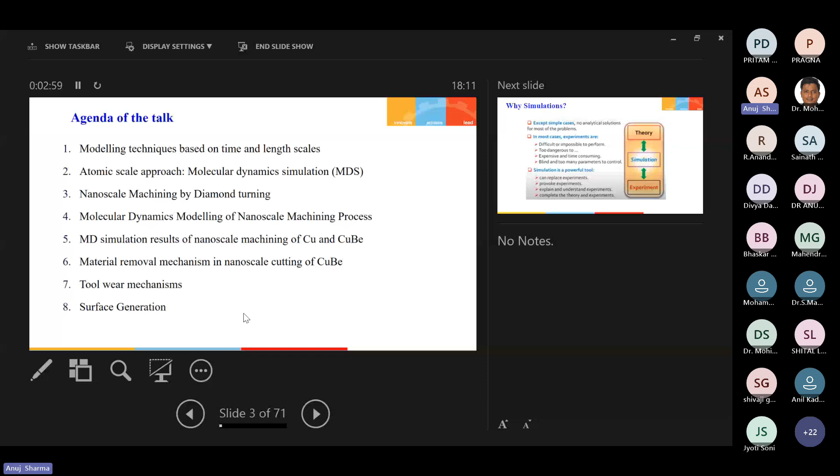So first question is why simulations? Simulations are important because except for simple cases, there are no analytical solutions available for most problems. So in those cases, either we can go for experiment or simulation.

But in some cases, experiments are also difficult to carry out, like the case of shock waves or blast experiments - these are very difficult to carry out. So there we need some kind of simulation where these experiments are either very expensive or dangerous to carry out.

So simulations help in these scenarios to understand the phenomena. Also sometimes experiments are expensive and time consuming as well, so simulations are very helpful there. And sometimes there are too many parameters to control, which also makes the studies difficult.

So simulation helps in saving the time, money, and also the safety - as I said, in some experiments the safety concerns are there. So these concerns are eliminated in the simulations.

Simulations are also very powerful tools where they can replace experiments, if any finding is there. So they also tend to provoke the experiments, motivating us to carry out some experiments.

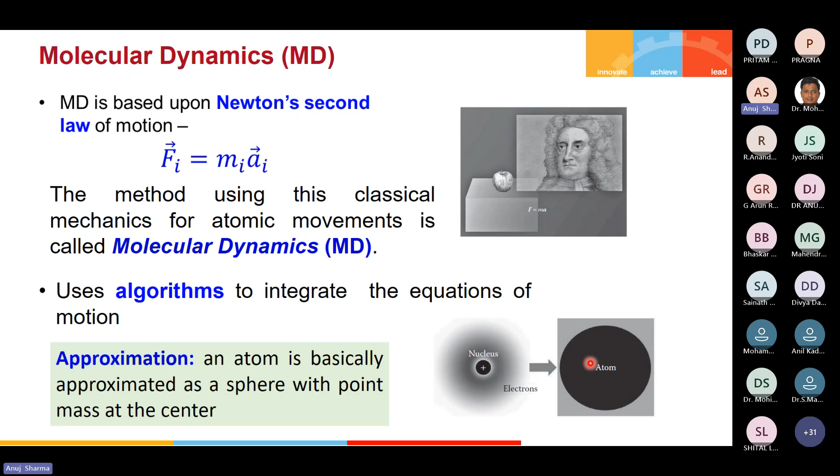Now, as I said, we have to use an interatomic potential function. For example, when atoms come close, they feel attraction first, and then repulsion. So up to a certain distance they feel attraction, and after that, if they come closer, due to electronic repulsion they will have some repulsion. These phenomena are put into an interatomic potential energy function, provided between the two atoms, catering for the repulsion and attraction that usually happen due to the electron and nucleus. Basically, we are not considering the electron and nucleus there, just these energies are considered by this function.

As I said, under the influence of force, this atom will gain acceleration, which is nothing but the derivative of velocity, and the double derivative of position. So if I integrate it two times, we get the position, and if we integrate it a single time, we get the velocity. But we should have another expression for the force, so that we can equate it to this equation. There is another equation for the force: if we take the negative gradient of the potential energy, then we get the force. So basically, one is the force between atoms, which is defined by this interatomic potential energy function.

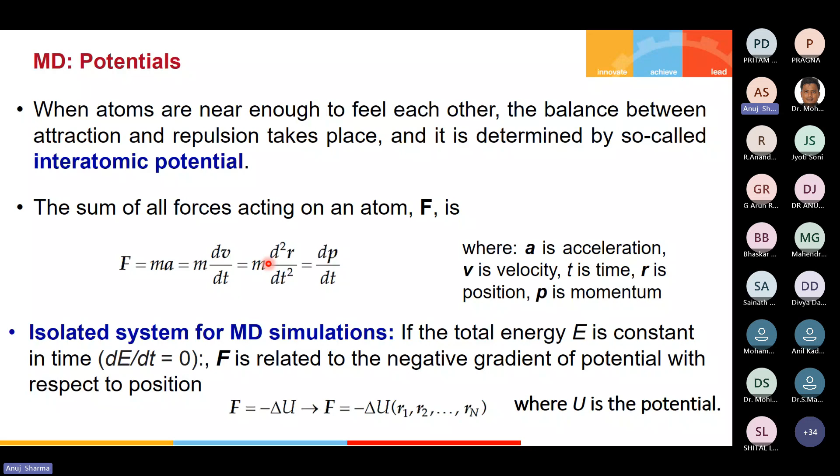This U is a function of the position of the atoms. One atom will be surrounded by different atoms, so that energy is stored in this U. If we take the single derivative with respect to R, the position, we get F, which can be equated to mass into acceleration. If we double integrate this expression, we get the position, and with single integration we get the velocity. In that way, we get the position and velocities of the atom, and at every time step we update those positions, velocities, and acceleration. So in that way, the time evolution of atoms happens in the simulation.

Now comes the thing of how we relate macro scale properties with micro scale behavior. In macro scale variables, we get things like volume, if we consider the gas, then volume of the gas, pressure in the gas, or temperature of the gas. But in the microscopic approach, we only know the velocities and the positions of the atoms inside that gas.

We have to relate these microscopic parameters with the macroscopic variables. This is the requirement. Then only we can analyze the macro scale processes with the help of the microscopic approach. This requires our statistical mechanical approach, which links the position and velocities of the atoms with the macro scale properties like volume, pressure, or temperature.

So there comes the famous ergodic hypothesis, which states that the ensemble average or sample average can be used to compute the average values, which can be replaced by the time average over the simulation. Basically, every macro state has different microstates. These microstates are sampled by molecular dynamics simulation using a small subset, known as the thermodynamic ensemble.

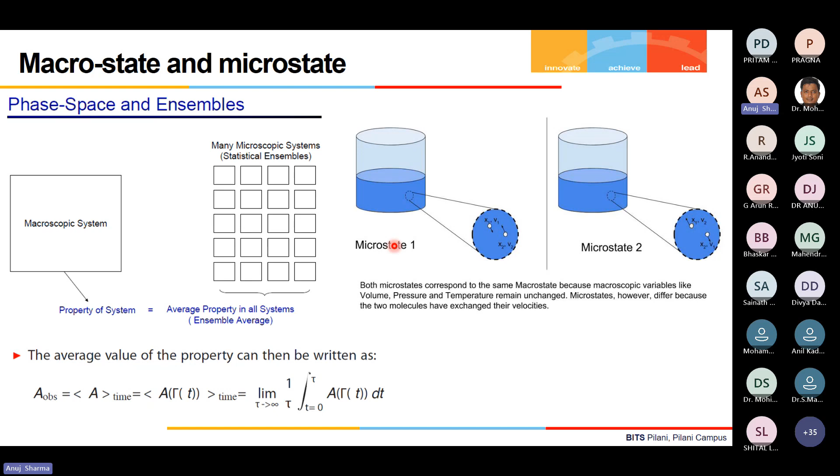So this phenomena is used in molecular dynamics simulation, that over time, if we integrate the properties, that will be equal to this average, which is the subdivision of this macroscopic system. Basically, the ergodic hypothesis states the long time average is equal to the ensemble average if we approach the time limit to infinite time. So for long time average, it will be equal. The ensemble average will be equal to your time average.

So there are various statistical ensemble systems which are used in molecular dynamics simulation, like the microcanonical, the canonical, and isothermal-isobaric system. Microcanonical is NVE - number of atoms, volume, and energy will remain constant throughout the simulation. Here your energy will be conserved, but temperature can vary, temperature or pressure can vary. In canonical ensemble, your number of atoms, volume, and temperature will remain constant.

These kinds of things are usually studied in endothermic or exothermic reactions. Temperature will remain constant, but energy can be exchanged between the system and surroundings, and also pressure may vary. In the third system, this is NPT, where the number of atoms in the system, the pressure and the temperature remain constant, and your volume may vary. This is close to our laboratory condition where ambient pressure and temperature are usually constant. So these three ensembles can be used for our molecular dynamics simulation.

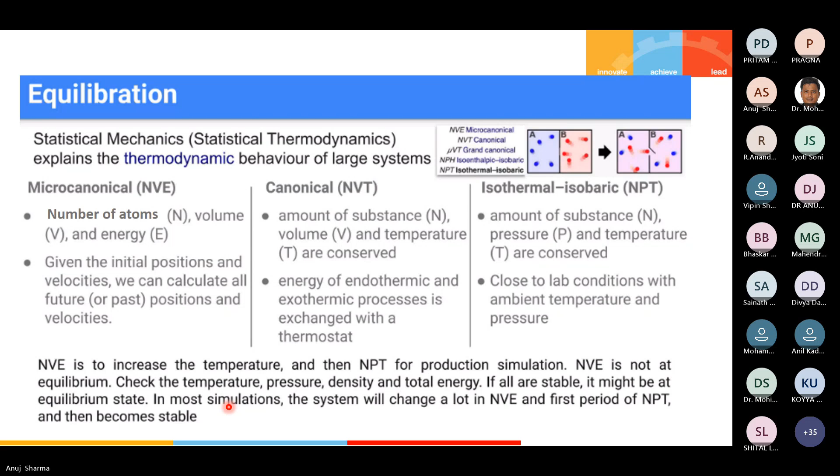So now the question that comes is what can be done with molecular dynamics simulation. Our MD can be applied to systems containing metallic systems, non-metallic systems, polymers, biomolecules, any chemical system - any chemistry we can study with this. But the limitation is that we have the length scale of nanometers and time scale varies from nanoseconds to microseconds. And atoms we can go for few hundreds to few million, but not very large systems can be studied.

And the phenomena we can study - chemical, mechanical, or physical phenomena - over these length scales and time scales. MD is suitable where experiments are not feasible, like if we have to microscopically analyze any system, cutting system, or any mechanical system, then we have to go for molecular dynamics study. And where the discrete effects are dominant, meaning your continuum approach is not valid, where the material has many impurities or heterogeneities - in that case, we cannot consider the material as homogeneous in nature, so we have to apply the molecular dynamics simulation approach.

And as I said, it is applicable for nanometric length scales, so we cannot apply this approach for very large systems like continuum scale problems.

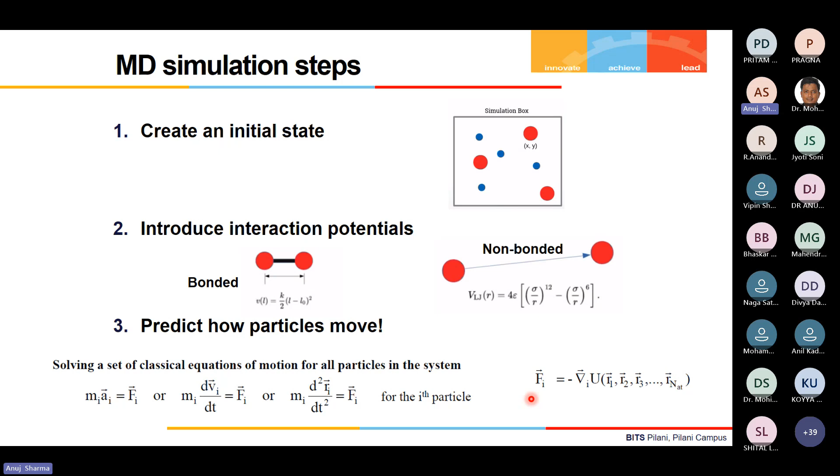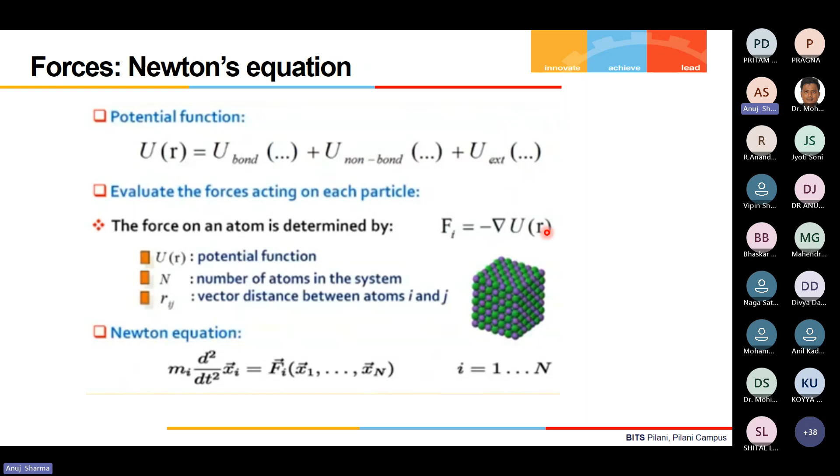What are the potential functions? As I said, they can be bonded, non-bonded, or external functions. Then we have to extract the forces between the atoms by taking the derivative of this potential energy, and the other equation is the force equation. So these have to be equated.

This potential energy can have different interactions, like attraction and repulsion. For example, when atoms come closer, first there will be attraction, and then there will be repulsion, so the energy becomes very high if two atoms come very close.

Similarly, there can be bonded attraction or charge-based interaction. If there are charges on the atoms, you have to add that formulation in the potential energy function. Similarly, if there are bonds, different orientations, angles, or rotations, every energy function has to be taken into account in this U.

Then we have to take the derivative of this U to evaluate the forces on each atom, and update the position or velocity of the atom. Initially we have the initial position and velocity, so we have to update this over incremental time, for one time step, how much it will move with how much velocity.

This is done with the help of Taylor series expansion. For example, we have to identify what is the position at the next time step, which is expanded using the Taylor series. Similarly, we can use this expression for the previous time step, which gives another expression.

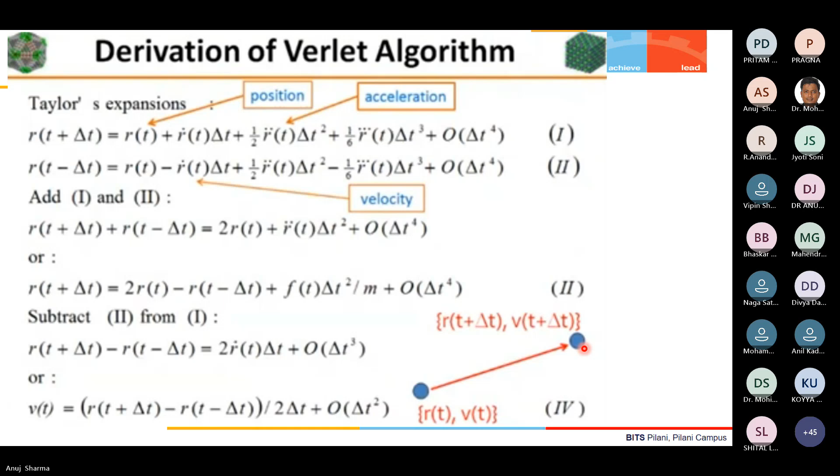Since these are MD simulation settings, we start with our atomic position, as I said, the initial position should be known. After that, we have to apply whatever material properties are there, like density, mass, charge, lattice constant. These kinds of things we have to mention in the code.

Then we have to supply this with initial velocity. Initial velocities basically depend on the temperature, based on the Boltzmann constant, or this equation, half mv squared equals 3/2 k into T.

So from the temperature, we can obtain the velocities. And then we have to apply the periodic boundary condition, because we have to simulate the bulk material properties. Usually we take it in nanometric scale, so to simulate the bulk material properties, we have to consider this periodic boundary condition. I will explain it later, but it's this PBC.

After we take the atom position and velocities into account, we have to set the interatomic potential energy function between them, because otherwise there will be no repulsion or attraction between those atoms. So we have to supply it with some potential energy function. There are different potential functions available in the literature.

After that, we have to select an appropriate time step, and it should usually be of the order of femtoseconds, because if it is larger, then we cannot understand the phenomenon happening at very lower time scale. So for understanding all the phenomena, we should select the least time step.

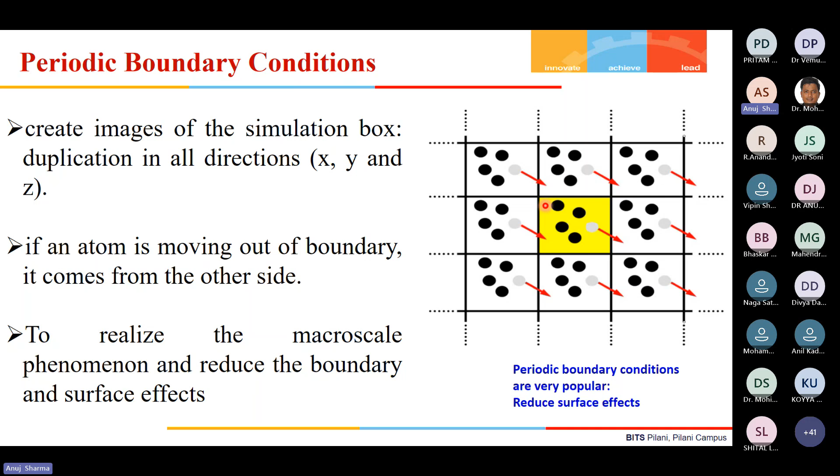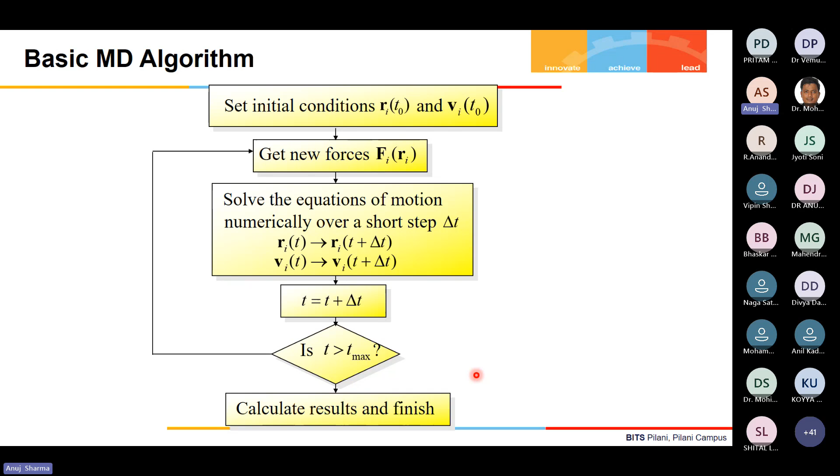Now I come to the nanoscale machining process, which is a single point diamond turning process that I have carried out during my PhD research work. It is basically an ultra precision machining process, a nano regime machining process in which the surface finish can be obtained within a few nanometers.

The shape accuracy can be achieved within tens of nanometers, and the size tolerances can be achieved in hundreds of nanometers. So everything is in nanometers. We cannot achieve these nanometer results if our cutting dimensions are of millimeter size. We have to use cutting dimensions in nanometer size, then only we can achieve surface finish in few nanometers.

So let's start with the significance of this ultra precision machining. In the year 1980, Taniguchi predicted for different machining processes how they will behave after 2000, like in 2020, what will be the nature of these processes. He found that the ultra precision machining process, which is single point diamond turning, will reach a machining accuracy of 0.01 micron, which is nothing but 10 nanometers.

This shows that the ultra precision machining process is able to produce better than 10 nanometer accuracy. And to get that nanometric level accuracy, the processing scale should be extremely small, then only we can achieve this nanometric accuracy. Single point diamond turning is the approach which can help in achieving this nanometric accuracy with very low cycle time.

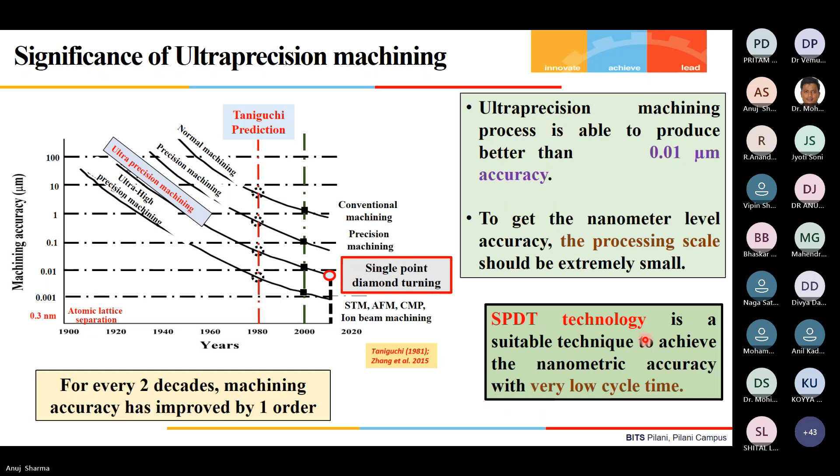So now I come to the diamond turn machining or single point diamond turning. It is basically a deterministic nano regime machining. Deterministic means tool path can be controlled. And as I said, the size tolerances, shape errors, and surface finish can be achieved within the order of nanometers. So basically, it is like a normal lathe machine, but this is supplied with very high-end technologies.

For the spindle, an air bearing spindle is used, and for the slides, hydrostatic slides are used. That can control the motion within the accuracy of nanometers, so only then we can achieve cutting dimensions in the order of nanometers. This spindle rotates the workpiece clockwise or anti-clockwise, and with the help of this relative movement between the tool and workpiece, we can achieve material removal.

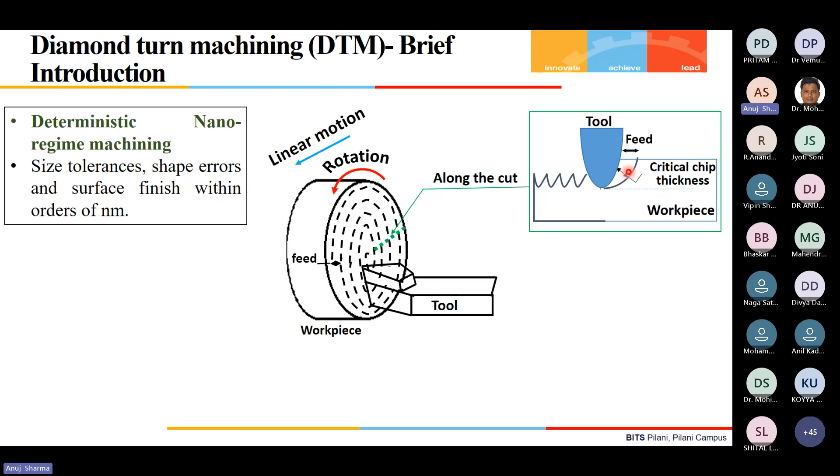Now, if we take this tool, we can see in cross section it makes feed marks on the workpiece, and this is known as the critical chip thickness. Below this chip thickness, no material removal will take place. So this is called the critical chip thickness. If it is more than the critical chip thickness, then only the material can be removed.

If we analyze closely this tool and workpiece interaction, we can see that the tool radius is in the order of nanometers, and the cutting depth is also of the order of nanometers. When these cutting dimensions, the radius and the uncut chip thickness, are in the order of nanometers, it means the atomic clusters of the tool and atomic clusters of the workpiece are interacting with each other, because there is a nanometric size of the tool, and the uncut chip thickness is also of the order of nanometers. That means they are interacting at nanoscale.

Coming to the diamond turn machine, it has evolved over the years. It started from 1960, where air bearing spindles were developed, and after that some feedback devices like optical encoders, which have accuracy better than 100 nanometers, were developed. After that, in the year 1979, the first diamond turning machine was developed, and regular developments took place. In the year 2010, this high-end machining, which has the capacity to generate free-form structures and micro features with size, shape, and surface finish of the order of nanometers, could be achieved. So it took a long journey and a long time to achieve these kinds of high-end surfaces by the diamond turning process.

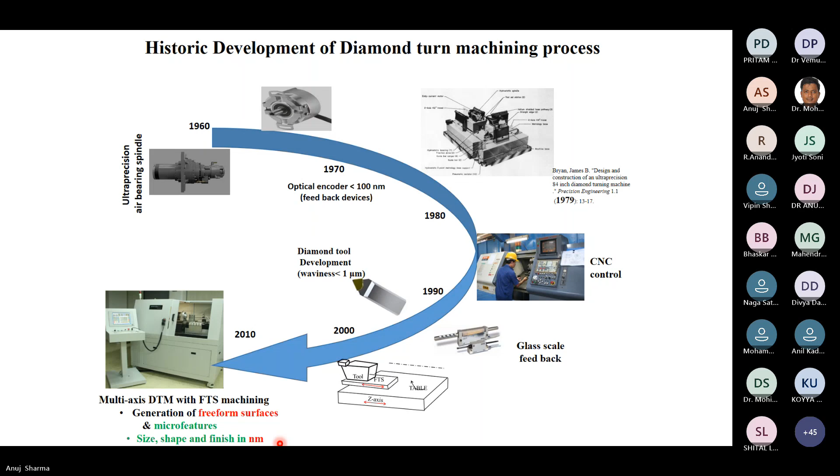If I differentiate between conventional cutting and nanoscale cutting: in macro scale cutting, usually your chip thickness is around hundreds of microns or sometimes in millimeters. In that case, the uncut chip thickness is very large compared to the tool edge. But in the case of nanometric cutting, it is less than 100 nanometers. There, your tool edge becomes dominant with respect to the uncut chip thickness. So in this case, the compressive forces or compressive stress is very high as compared to macro scale cutting.

This is the basic difference, and the mechanisms also get changed. Here you can see the shear plane cutting mechanism, where the chip comes over the rake face of the tool. But in nanoscale cutting, because there are compressive stresses, the material has an extrusion kind of mechanism. Extrusion means it can go to either side of the tool.

In terms of mechanics approach, because macro scale cutting is at a larger scale, we go for a continuum or homogeneous approach, considering the material as homogeneous in nature. Whereas in nanoscale cutting, since the nanometric size of the tool and nanometric uncut chip thickness are interacting with each other, we have to go for atomic scale simulation because it shows heterogeneity, where atoms or clusters of atoms in the tool and workpiece are interacting. So for the simulation method, we go for finite element method for macro scale cutting, but molecular dynamics simulation is adopted for nanoscale cutting.

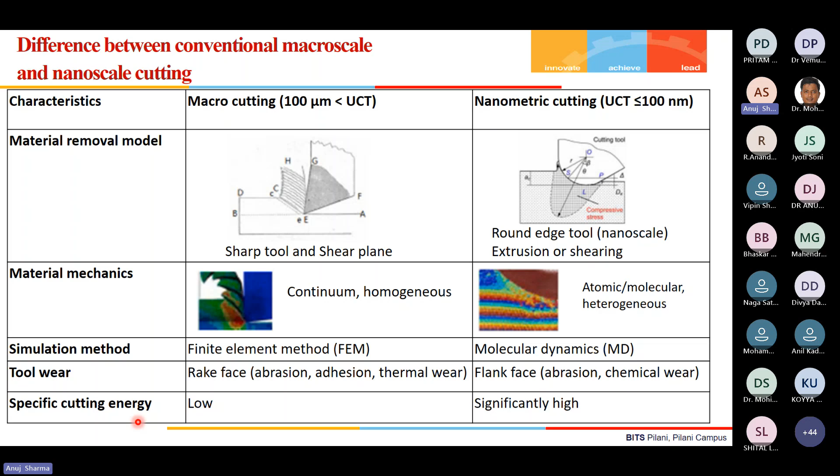And the specific cutting energy, which is the cutting energy required to remove a unit volume of material, is very low in the case of macro scale cutting - the energy requirements are very low, but it is significantly higher in the case of nanoscale cutting.

The motivation for this research comes from the fact that conventional machining has very high surface roughness on material surfaces, but with diamond turning you can achieve very low surface roughness, of nanometric level. In ductile machining, metals can be smoothly machined, but brittle materials result in fractured surfaces.

The motivation also comes from the fact that when we have a heterogeneous surface, like an alloyed surface with hard inclusions or particles, the mechanisms were not well understood. So in my PhD, I took that heterogeneous material to study with the help of molecular dynamic simulation, to see how it behaves during nanoscale machining.

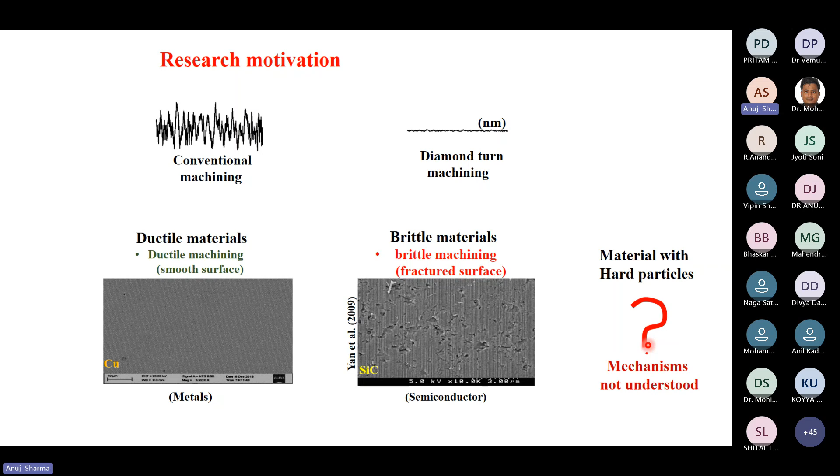For that, I carried out a decade-wise literature survey on the SPDT process, single point diamond turning. I found that this machining technology developed decade by decade. Initially, machine tool building took place in the first decade, and after that they slowly carried out machining and understood some process mechanics on soft materials, followed by understanding material removal mechanisms, surface quality, tool performance, and crystal orientation.

From 2005 to 2015, they tried to understand brittle materials machining and tool wear. Molecular dynamic simulation was also introduced in this decade. After that, they studied wear mechanisms as well as micro feature generation and freeform machining. In the current decade, there's a challenge to study difficult-to-cut materials, heterogeneous materials, or hybrid materials.

That's why I selected copper beryllium material to study, because it contains hard particles. It has a soft copper matrix with hard particles in between, making it difficult to machine. So I studied it with the help of molecular dynamic simulation.

As I said, there were research gaps, like hybrid material machining with diamond tools had received little attention. The effect of work material, mechanism of material removal, tool edge condition, and machine tool vibration on the diamond turned surface were not extensively studied.

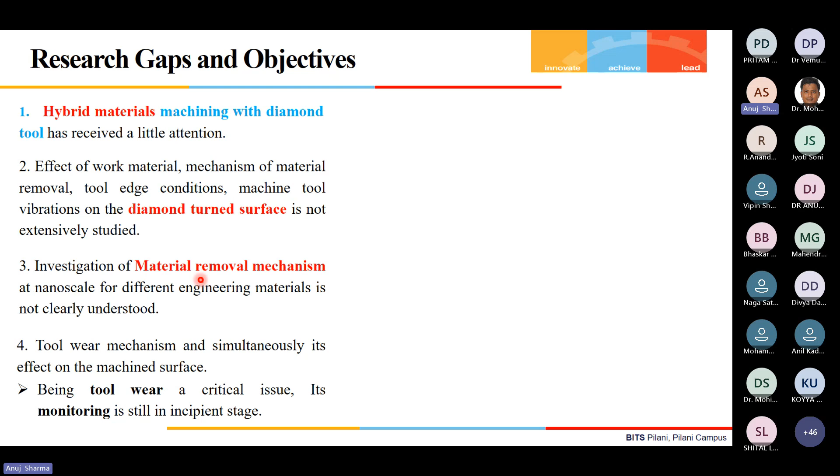Material removal mechanisms at the nanoscale are also not clearly understood for different materials. Tool wear is a critical issue because the diamond tool is very expensive, so tool wear needs to be understood for machining any material. Otherwise, if tool wear is high, it can lead to very large machining costs.

This led to some objectives, like studying tool and hard particle interaction during machining of hybrid materials. Another objective was applying molecular dynamic simulation to understand the material removal mechanism, tool wear mechanism, and the effect on the diamond-turned surface or subsurface damage, as well as developing a tool wear model based on the mechanism and tool condition monitoring.

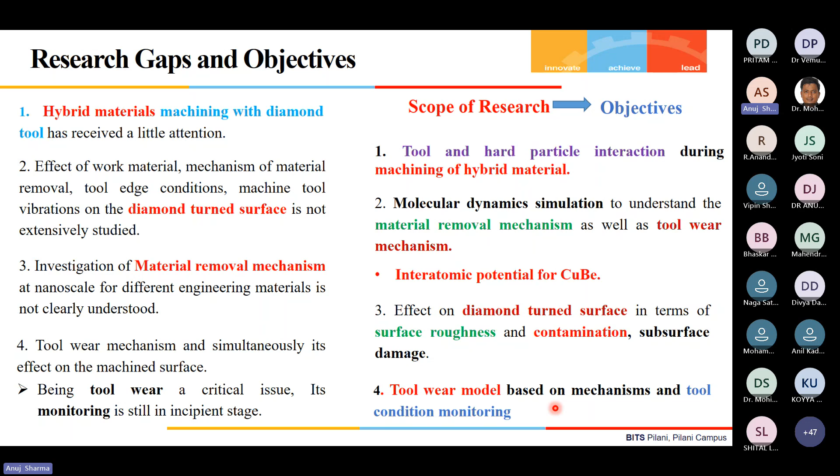Coming to numerical simulation of machining: if the uncut chip thickness is on the order of millimeters, we need to go for finite element scale. If it is less, we can go for mesoscale. If it's even smaller, we have to go for the molecular dynamic simulation approach, where the uncut chip thickness is on the order of nanometers.

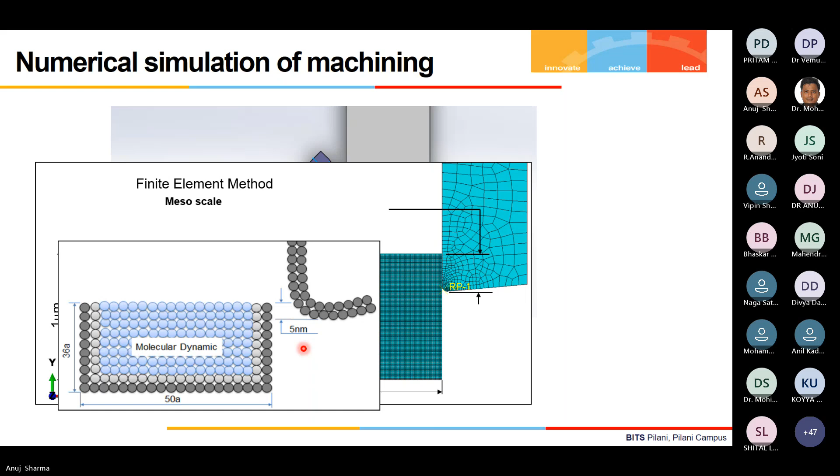Coming to molecular dynamic simulation of the nanoscale machining process: basically, the tool is given a velocity, meaning the tool atoms' position and velocities are updated. This applies force on the workpiece atoms, which also changes their position and velocities. So this has to be updated every time step, with respect to time, for both the workpiece and tool atoms, to see what changes occur on the surface of the workpiece.

For that, I modeled my tool and workpiece. I initially took copper as my workpiece, which was converted into atoms. The workpiece has a length of 30 nanometers, height of 12 nanometers, and width of around 18 nanometers.

We have to mention the cutting plane and orientation because this is at the nanoscale, which actually comes from the crystal structure. So we have to specify the cutting plane and direction. In this case, I took the 010 plane and the 100 direction for cutting. Copper is considered here, and it has an FCC structure.

It was mentioned in the code that the copper atoms should be created with the FCC structure. The tool is a deformable tool made up of single crystal diamond, which is why it's known as diamond turning. It has the diamond cubic structure. These are the number of atoms considered in the tool and workpiece.

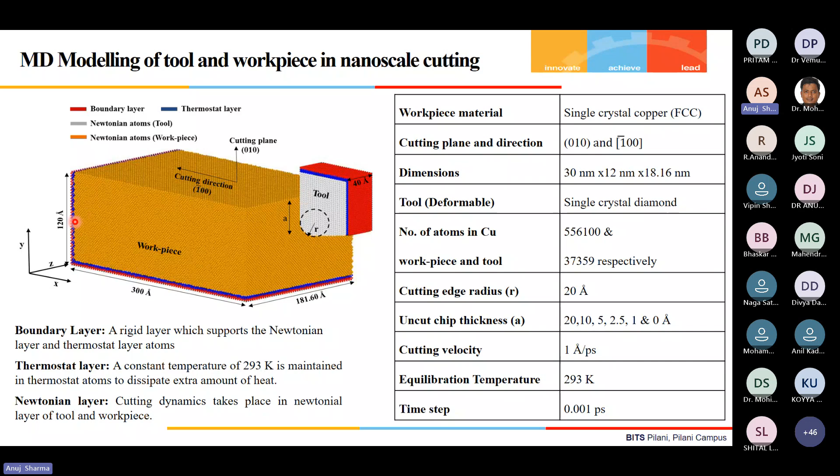For the copper-copper interaction in the workpiece, we use the EAM method, that is embedded atom method. For metallic systems we use the embedded atom method, which is popularly known and available in the literature. For the tool, since it's made of diamond with carbon-carbon bonding, which has covalent bonding, that can be easily analyzed.

With the help of the Tersoff potential, we need to model the carbon-carbon interaction. Between the copper and carbon, because the workpiece has copper atoms and the tool has carbon, the Morse potential is used. That is a very good potential to study the surface interaction between the tool and workpiece.

Here A is the uncut chip thickness and R is the tool edge radius, the cutting edge radius. The software I used for simulation was LAMMPS, and for visualization there was Ovito software.

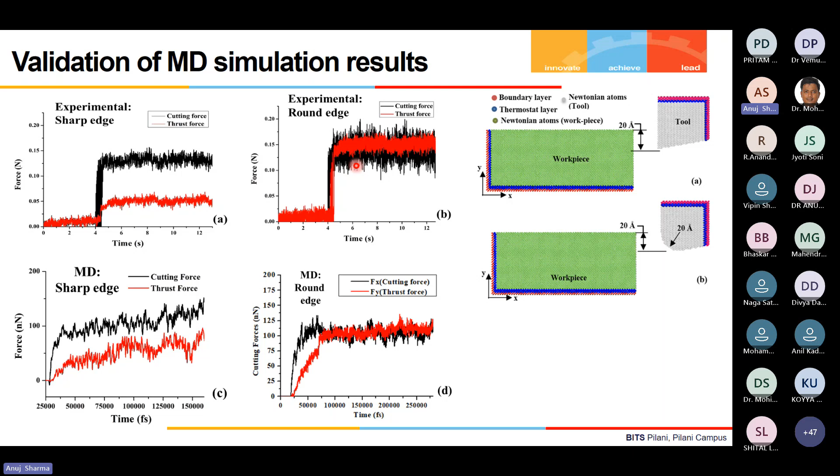Similarly, I carried this out for the sharp cutting edge and round cutting edge in the experiments, and it showed a similar phenomenon. For the sharp edge, the cutting forces were more than thrust forces, and for the blunt cutting edge, it was almost similar. When I compared the force ratios, they were close in both the sharp cutting edge and the round cutting edge.

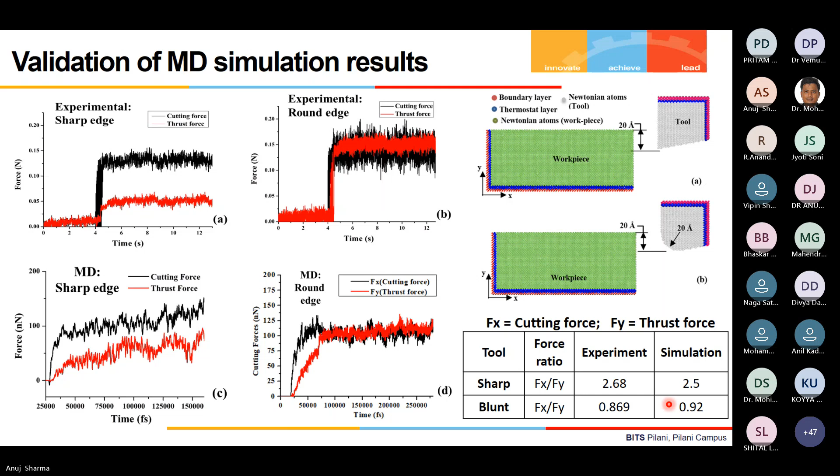After validation, I studied the material removal mechanisms for nanoscale cutting of copper for different A/R ratios, which varied from 2 to 0. It showed that material removal took place by dislocation flow. These dislocations propagate in the 110 direction. In every A/R ratio, the radius is the same, but we are changing the uncut chip thickness, so it is being reduced.

Initially there is shear plane deformation, and after that an extrusion mechanism takes place. Some of the material goes beneath the cutting tool, and once the uncut thickness is very much reduced, only elastic deformation takes place. Now no cutting is happening, so only a rubbing phenomenon occurs.

Based on these force ratios, we can define three cutting regions in this cutting simulation. For A/R greater than 1, there is shear plane deformation, meaning cutting or chip formation happens through shear action. For A/R ratios from 0.25 to 1, a plowing mechanism takes place, where material goes sideways in an extrusion-like phenomenon—half the material goes ahead of the rake face of the tool, and some goes beneath the tool. For A/R less than 0.25, only elastic deformation takes place.

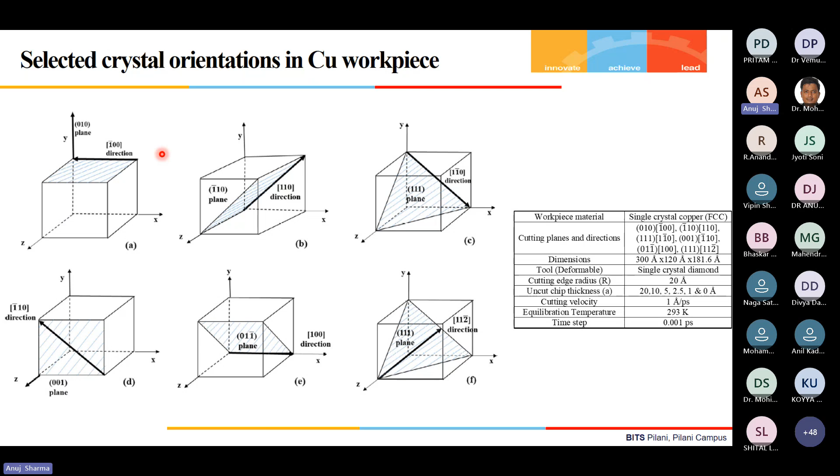Similarly, I carried out the cutting simulation for different crystal orientations for the copper workpiece. Six different orientations were considered, and different uncut chip thicknesses were taken, while other parameters stayed the same. For example, we take the 010 plane and 100 direction orientation, and similarly we can change the orientation of the cutting plane and direction.

What I observed is that slip-induced deformation dislocation mostly took place in the 110 direction, because the 111 plane and 110 direction denote the slip system, meaning shear slip can be formed more easily in this cutting orientation. That's why the 110 direction is most dominant, and we see that most subsurface damage occurs in the orientation where the 110 direction is vertical, since slip can propagate easily in that direction, causing substantial surface damage.

Similarly, if we check the variation of forces and cutting energy, the maximum force occurred for the 011 and 100 orientation, and the minimum for 111 and 110, because it denotes the slip system—it is very easy to deform in this orientation, so minimum force is required.

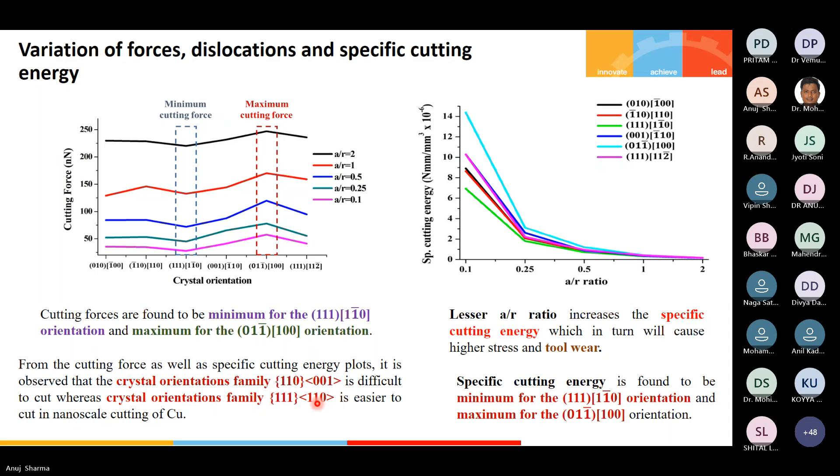Similarly, I studied copper beryllium. In copper beryllium, beryllium acts as a very hard particle inside the copper matrix. This material is extensively used in nuclear industries as high-speed bearings, but it has the limitation that it can cause excessive tool wear and surface degradation, because during machining, these hard particles, when encountered with the workpiece, cause tool wear.

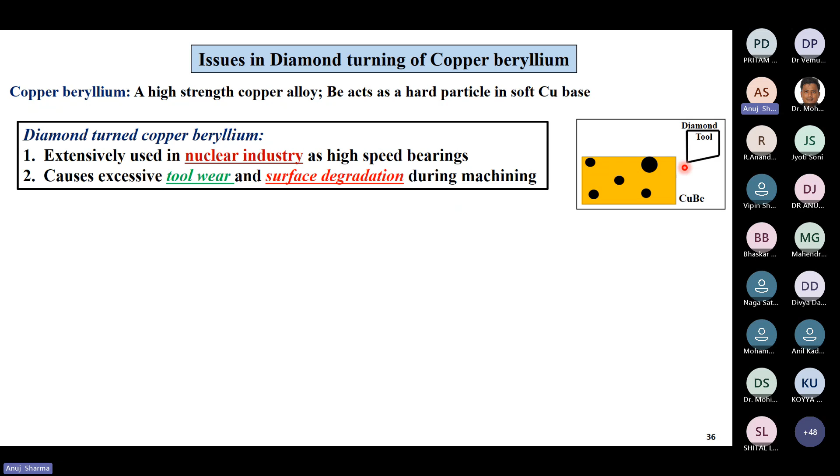The objectives here were to study the material removal mechanisms using molecular dynamic simulation, and to identify and understand the wear mechanism of the single crystal diamond tool during machining using MDS and experimental investigation, and similarly to study what effects occur on the surface.

So that effect has to be studied with MDS and experiments. Similarly, for copper beryllium, the model was prepared.

For the workpiece, which is made up of copper that has FCC structure, the beryllium particle was introduced, which has the HCP structure, hexagonal closed packed structure. And for the tool, this covalent bonding is there, so this diamond cubic structure is there. And the interactions are for copper and copper.

Similarly, the EAM potential was used for carbon and beryllium and carbon. Since covalent bonding is there, the Tersoff potential was used, and for surface interaction, the Morse potential was used. Similarly, boundary layers are used in both the tool and workpiece to support these Newtonian layers, and a thermostat layer is used to dissipate the extra amount of heat.

Some assumptions were considered, like the beryllium rich phase consists of pure beryllium, where the base material is made of pure copper, and these are considered to be spherical in shape. In reality, they can have different shapes, but here it is assumed for simplicity that spherical shape was considered. The simulation was carried out at 293 Kelvin, and the system follows NVE dynamics.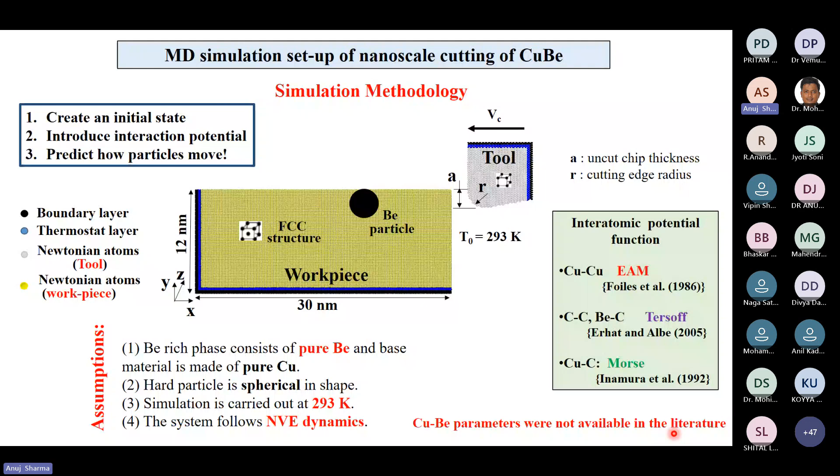The copper beryllium parameters were not available in the literature for this interaction potential energy function. So for that, I applied the first principles calculation, which is a quantum simulation based approach to evaluate the parameters for the interatomic potential. So for that, I took two atoms, copper and beryllium.

Their distances were changed. Based on this quantum mechanical effect, initially when the two atoms were at a far away distance, there was some weak attraction. When they were brought closer, attraction becomes stronger. And once they are brought more closer, after this equilibrium distance, there was some repulsion shown. So higher energy means least stability, and lower energy means more stable. So here the structure is more stable.

At this point, these parameters were extracted and fitted with the Morse fitting parameters. So the Morse function is this one. The parameters were evaluated: D is the binding energy, which is nothing but this parameter minus 0.0563. Similarly, alpha is the width parameter, how much width is assumed, and the equilibrium distance is at 2.065. So these parameters were evaluated, and this function was incorporated in the molecular dynamic simulation.

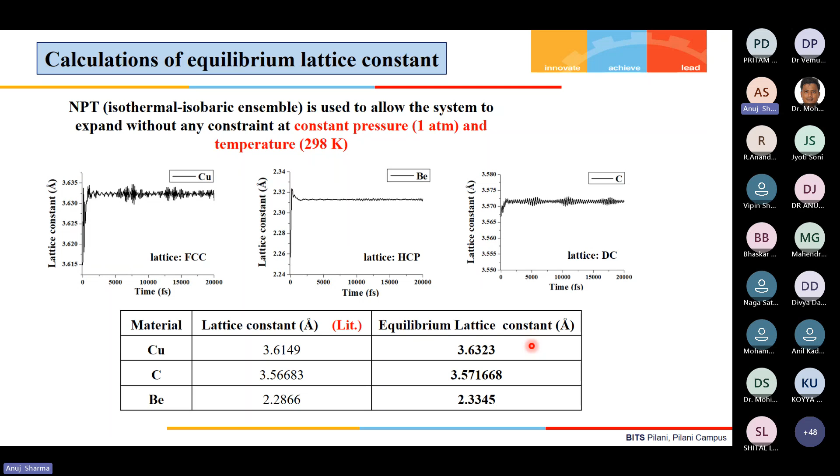Once the structure was defined in the MD code, MD simulations were run, and results are being presented here. So what happens initially is that when the tool cuts into the workpiece,

there are shear plane deformations that took place in the copper region. But as soon as it encounters the particle, because the particle is hard in nature, it is pressed against the workpiece. And when the tool moves over the particle, because of elastic recovery, it comes out of the workpiece, so the workpiece has certain voids and projections.

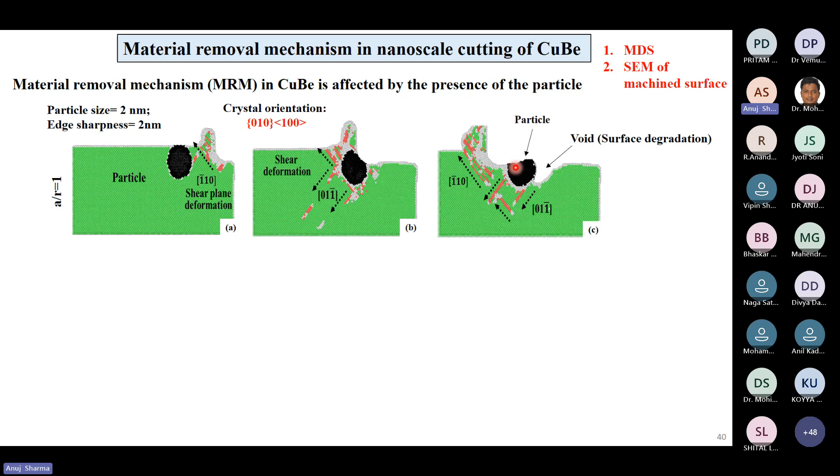Also, when the particle was closely monitored using MDS, it was seen that since it is hard and brittle in nature, there was some crack formation that took place in the particle. These amorphous cracks were generated, shown by the amorphous layer.

These are beryllium atoms, the black ones, and this shows the cracks, which are separated by this white color amorphous layer atoms. This shows that there is a brittle transition taking place in the particle, brittle fracture. It was also observed in the experiments that when the surface was analyzed on these beryllium particles, there were cracks.

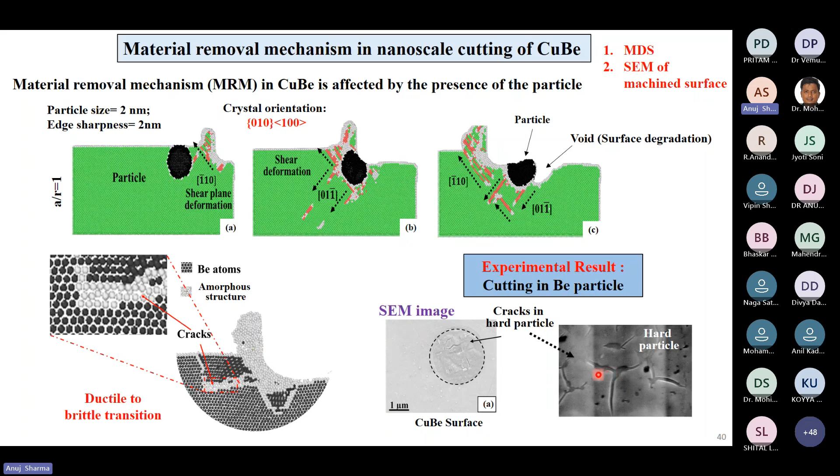These cracks were observed in the hard particles. So similarly, these dislocations were also analyzed. It was seen that initially copper has a certain dislocation, and when it comes closer to the hard particle, they become nucleated because this dislocation flow is hindered by the hard particle.

But after the tool faces this hard particle, it starts pushing this hard particle, which forces the copper material ahead of it. So a lot of dislocations are generated because of the force coming from the hard particle, which in turn comes from the cutting tool.

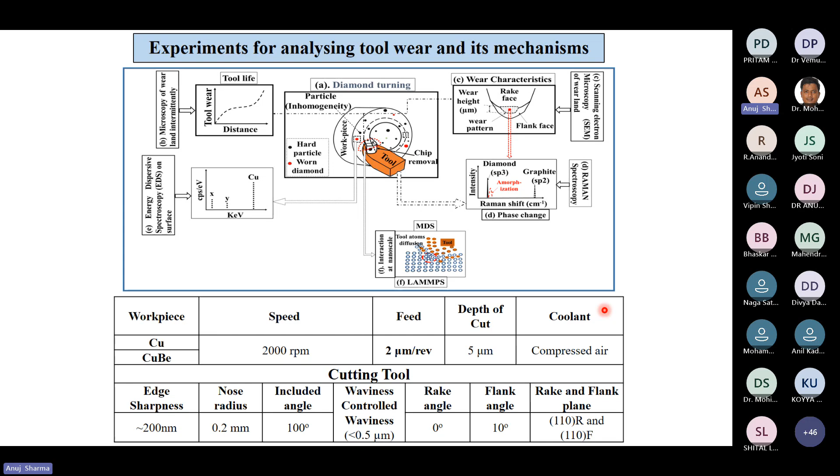Similarly, some experiments were carried out for tool wear. These are the parameters used for understanding the tool wear, and the mechanisms were also understood with the help of MD simulation. This is the experimental setup, which is the diamond turning facility.

There is a spindle and a tool post. In the spindle there's a vacuum chuck, because we cannot handle these fragile components in mechanical chucks. So a vacuum chuck was used, hydrostatic slides were used for movement, and an air bearing spindle was used in the experiments.

When I plotted the wear length with respect to cutting distance, it showed the extent of tool wear. In copper, it almost covered more than 20 kilometers of cutting distance, but in copper beryllium, the flank wear was very dominant.

It can be identified by 3 regions in copper, but in copper beryllium there were only 2 regions, because after the initial wear there was a catastrophic amount of wear that took place in the tool used on copper beryllium.

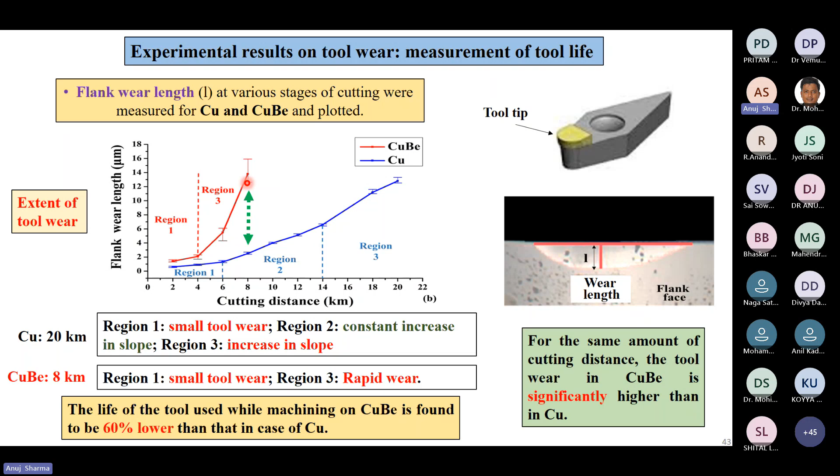It was found that the tool used on copper beryllium has 60% lower life than the one used on copper. So I tried to find out this difference between copper beryllium and copper for the tool using MDS.

I took the sharp edge tool and the blunt edge tool, and the workpiece material was considered with the beryllium particle. It was seen that when the tool encounters this hard particle, the stresses were quite high at the edges.

The structural analysis showed that microchipping was taking place in the sharp edge tool when it encounters the hard particle, and in the round cutting edge there was an amorphous layer generating, meaning phase transformation was taking place in the case of the round cutting edge.

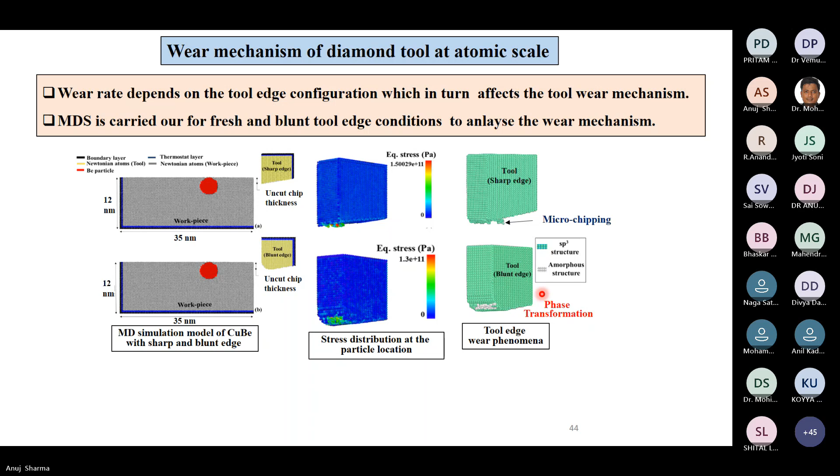So it can be concluded that the sharp cutting edge, due to sudden impact load, causes very high stress at the sharp cutting edges, which causes microchipping. And in the blunt cutting edge, the stress induced phase transformation weakens the cutting edge.

This was also seen with the help of coordination number. The coordination number in the bulk is 4, and at the outside, on the surface atoms, it showed 2 and 3. But here we can see there is an amorphous layer being generated, which weakens the cutting edge and dominates the tool wear mechanisms.

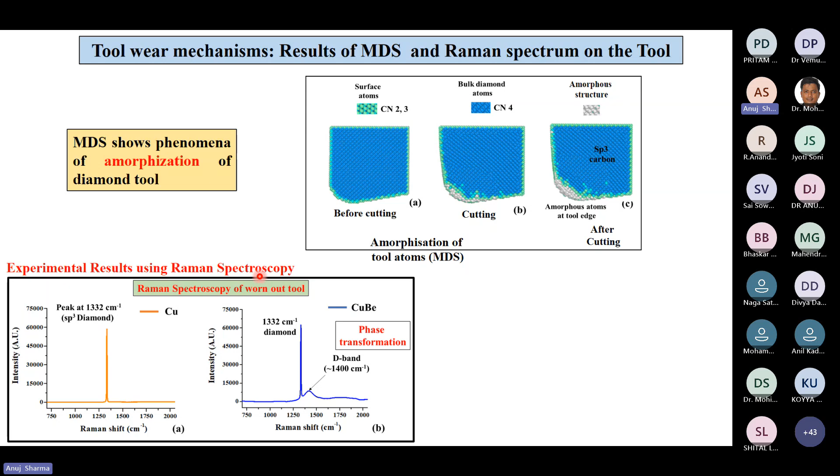This was also seen with the help of experiments. When I carried out Raman spectroscopy on the tool used for copper as well as copper beryllium, it was seen that for copper there was only a single peak, showing that only sp3 diamond was present on the tool.

But in the case of copper beryllium, the tool showed one single larger peak corresponding to diamond, but there was another peak corresponding to the D band, or amorphization of the diamond. So some amorphous layer was formed, shown with the help of experiments as well. We can state that for copper there is atom by atom removal of tool atoms, while for copper beryllium the tool wear takes place by phase transformation.

Similarly, Raman spectroscopy was carried out on the copper beryllium surface. When tool wear takes place, atoms from the tool come onto the workpiece surface. So the surface was analyzed with Raman spectroscopy, and at different cutting distances, different peaks were observed. This means amorphization, the amorphous atoms, were increasing, shown by the peak at 1400 inverse centimeters, which kept increasing, meaning more amorphous atoms were forming on the workpiece surface.

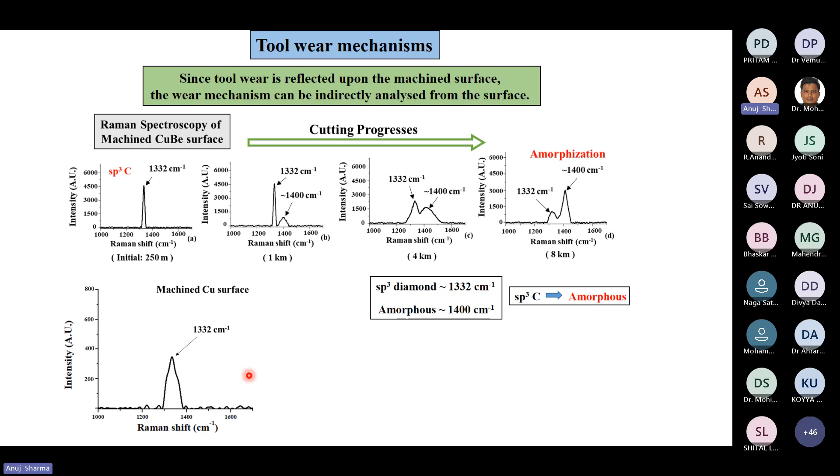Coming to surface roughness, similar cutting parameters were used and the surface was analyzed for roughness. FE-SEM analysis was carried out. The morphology was seen on the surface, and any contamination that took place was also analyzed. First, similar to the tool wear graph, surface roughness was analyzed.

It was seen that similar to tool wear, surface roughness also increased for both copper and copper beryllium, but the extent of surface roughness was greater in copper beryllium. There was almost a 48% increase in surface roughness compared to copper.

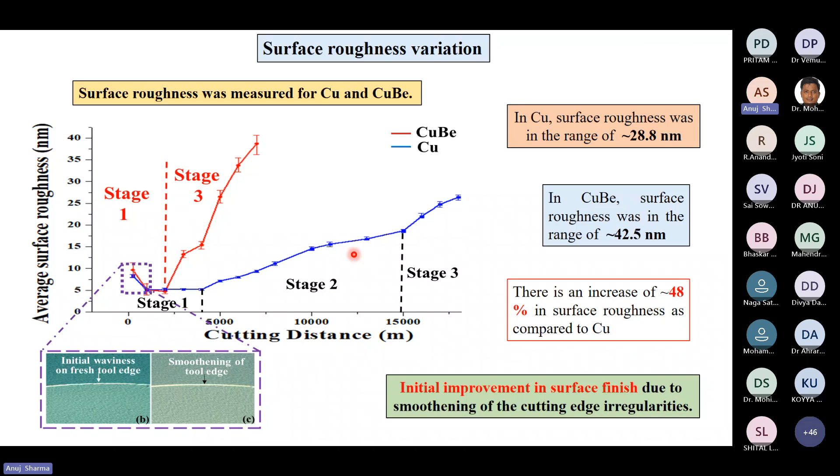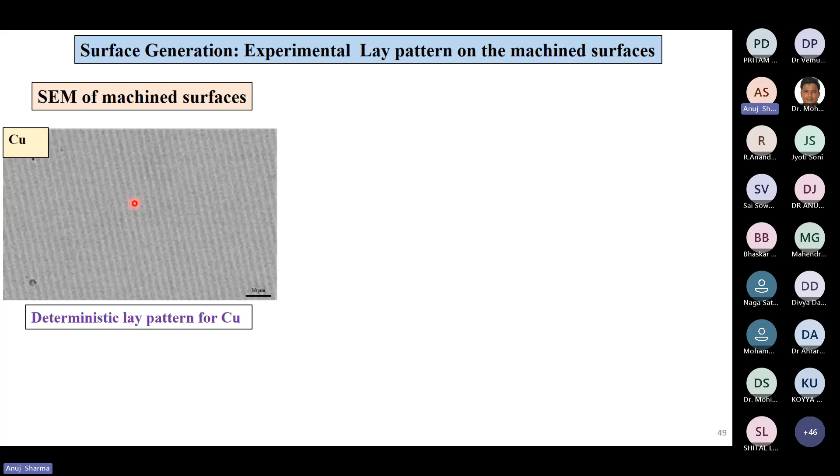By checking the SEM images, it was seen that for copper there was a well-defined pattern, a deterministic lay pattern. But in the case of copper beryllium, there was no visible pattern like in copper.

Although similar parameters were used, only a flat surface was observed. It was initially expected that a random lay pattern had been introduced on the copper beryllium surface, and it is expected that hard particles may have caused this transition in lay pattern.

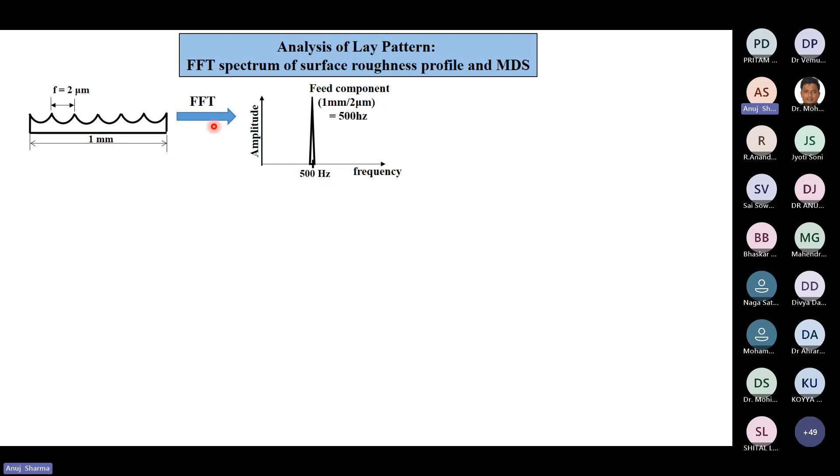So I carried out FFT, fast Fourier transform, meaning that if we have 1 mm of surface profile and feed marks of 2 microns, the peak would be observed in the 500 Hertz frequency region.

For the copper surface, these 500 Hertz frequency marks were obtained, but in case of copper beryllium, there were no 500 Hertz frequency marks. Those feed marks were not there, and instead there were dominant frequencies in between 0 to 30 per mm — very low frequency components.

So what could be the reason for that? Again, I carried out the MD simulation. I introduced the feed marks on the workpiece itself and considered the hard particle in the simulation.

What I saw was that when the tool interacts with the particle, the tool moves in the horizontal direction due to the force caused by the hard particle, and that levels the feed marks. It was also analyzed with the help of a force diagram, which showed that in the beryllium particle region, the lateral force becomes very high.

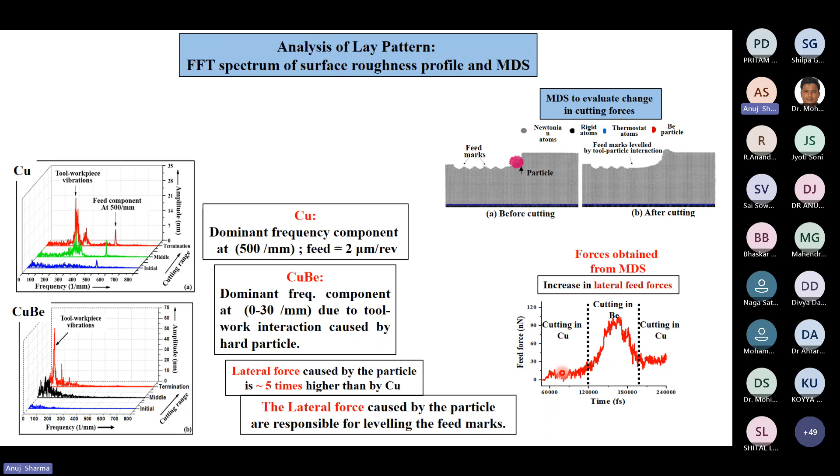This was seen with the molecular dynamics simulation — the lateral force becomes very high, causing the tool to move laterally, which levels these feed marks. It was seen that the lateral force was 5 to 6 times higher than when cutting copper, so lateral forces were responsible for leveling these feed marks.

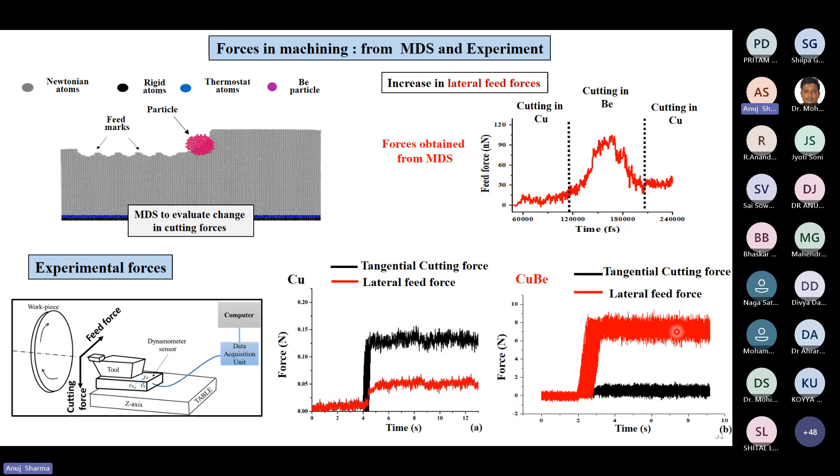I also checked this in experiments, which showed that initially the cutting forces were higher, but as tool wear took place for copper beryllium, the lateral feed forces became high. So in copper, the cutting forces were higher, while for copper beryllium, the lateral feed forces were higher, causing the tool to level the surface. That's why the random lay pattern was observed.

So after that, I analyzed the surface for any chemical contamination. X-ray photoelectron spectroscopy on copper beryllium surface was carried out, and it was seen that for copper and copper beryllium, the following peaks were observed: at 284.8, which corresponds to the carbon-carbon peak; at 286, the carbon-oxygen peak; and at 288, the C double bond O peak. So these three peaks were observed.

So basically in copper, mostly the CO and C double bond O peaks were dominant, but in copper beryllium, the carbon peak is dominant. By also comparing it with Gibbs free energy, we can see which reaction is dominant. If we check all these chemical reactions, delta G is more negative in these two cases, so those reactions are more dominant on the surface, whereas the others have higher energy, so they are not feasible reactions.

So basically, oxidation of the diamond tool on the workpiece is taking place. Delta G is lowest for carbon dioxide and CO, so that's why oxidation of these worn-out diamond atoms takes place on the workpiece. In copper beryllium, the surface contamination mostly takes place through the carbon-carbon bonds, which are just wear particles from the tool.

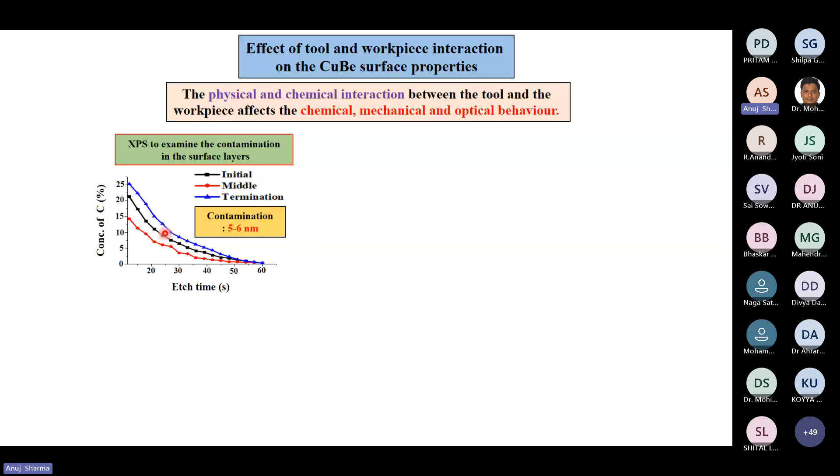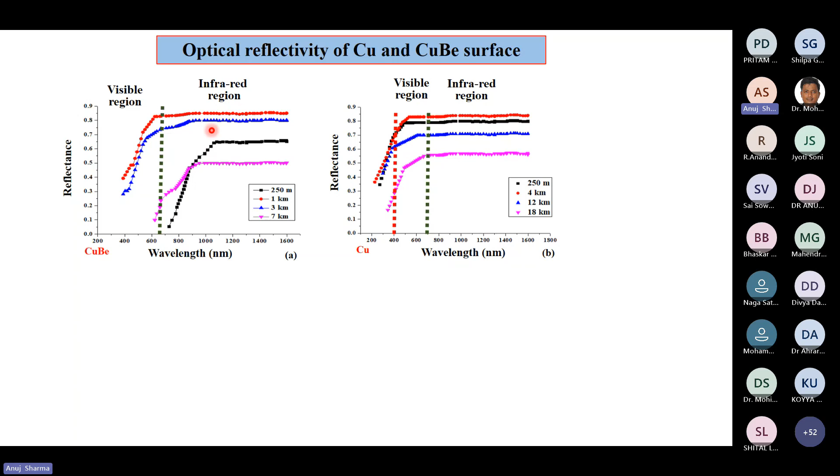Coming to optical reflectivity, since these are nanometric optical surfaces, optical reflectivity was checked for copper and copper beryllium. For copper, it showed that these surfaces are applicable for the infrared region as well as the visible region. The visible region is 400 to 700 nanometers, and after that is the infrared region. Copper surfaces are more applicable for infrared as well as visible regions, whereas copper beryllium, since it has more dislodgements, voids and projections, is mostly applicable in the infrared region. In the visible region, its optical reflectivity falls very rapidly, so it is mostly applicable in the infrared region.

Coming to the major conclusions: I tried to find out the wear mechanism and surface generation mechanism, and it was found that the dominant mechanism was phase transformation in the form of amorphization, which was identified as a new wear mechanism in the diamond tool when used on copper beryllium.

On the workpiece surface, a random lay pattern was obtained, due to the beryllium particles causing suppression of the deterministic lay pattern. The material removal mechanism in case of copper beryllium is phase dependent, meaning in the copper phase, the ductile machining mode was observed, whereas in the hard beryllium phase, brittle fracture took place.

The material removal mechanism is phase dependent: in copper, there was shearing action, plowing action, and elastic-plastic deformation, depending on the A/R ratio. In the hard beryllium phase, there was brittle fracture. If we lower the A/R ratio, we can have ductile regime cutting conditions as well.

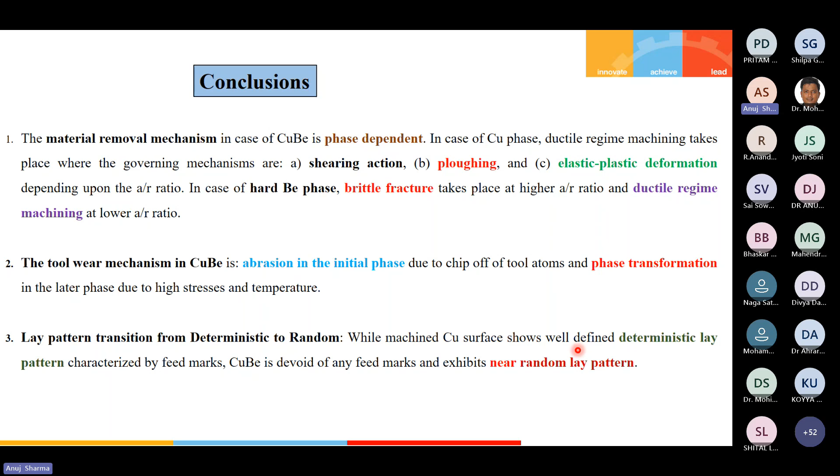Comparing tool life, cutting distance covered on copper is 18 kilometers, whereas it is 8 kilometers in case of copper beryllium, so copper beryllium causes more tool wear. The wear mechanism is atom by atom, called attritious wear, in the copper material, whereas in copper beryllium, there is phase transformation of the diamond to an amorphous layer.

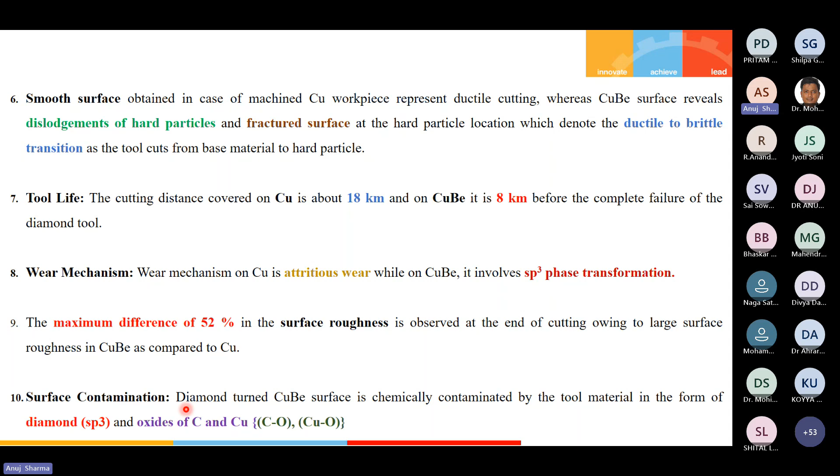If we compare the surface roughnesses, there was a huge difference. The maximum difference of 52% was observed between copper beryllium and copper. Surface contamination also took place in the form of oxides of carbon and copper, and in the copper beryllium, diamond particles were observed on the surface.

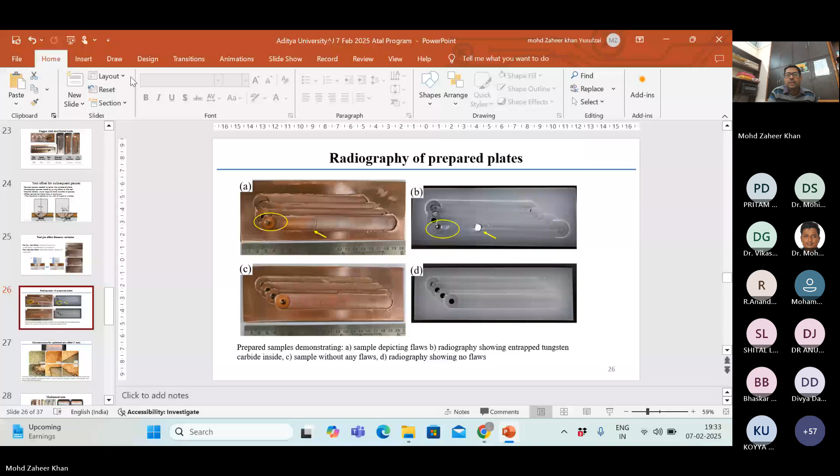Sir, am I audible to you? Yes, you are very much audible. Am I audible? Yes, sir, you are audible. Now, sir, you can share your screen. Sure. So my camera is also visible. You can see me, camera is visible. If you want, you can switch off camera also. You can share your screen, sir, as per your wish. It's better to make your camera on, please. Okay, so I have shared my screen. Is it visible? Yes, sir, it's visible. Is it on the slideshow mode? Sir, now it's clear. It is on the slideshow mode, right? And the slides are also moving? Yes, sir, it's moving. Good.

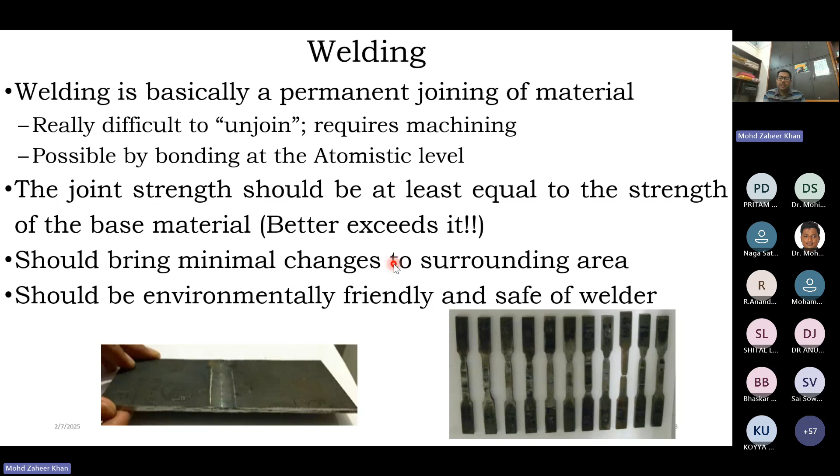Now I will introduce you to another topic that is an allied process of welding, known as surfacing. Surfacing refers to the technique of depositing a layer of material over another material, and that other material on which a layer has been deposited is called the base material or substrate material. This deposition is done with the aim of obtaining some desired property on the surface which is not intrinsically present in the underlying base material.

So am I clear up to now? You can always interrupt and ask if you have any question. Any questions from anybody till now? Okay, fine.

Any doubts? Somebody is trying to say something. Is anybody asking a question, or has somebody unmuted the mic? Okay, I don't know. Okay.

So one of the objectives of deposition of material could be to deposit a wear resistant material on a substrate for increasing the component's wear resistance, so that wear and tear of the component does not take place and it makes the component last longer. If that is the objective of depositing a layer of material on the substrate, this is known as hard facing.

There may be another application where the substrate material is not corrosion resistant and it is getting corroded by some environmental medium. In such cases, you can deposit another layer of material such that the deposited material has superior corrosion resistant properties. If that is the case, the objective is to impart corrosion resistance to the substrate material, and the process is now called cladding.

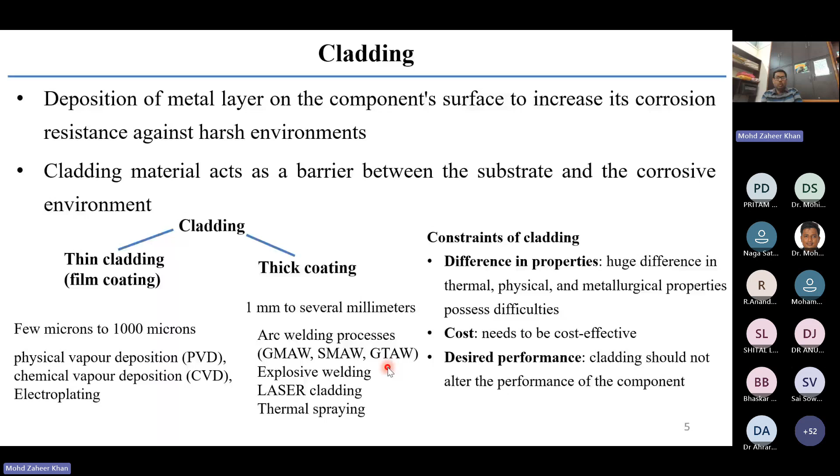Currently, the processes being used in industries include, one that is very popular, gas metal arc welding or arc welding processes. Also popularly used is the submerged arc cladding process. Gas tungsten arc welding can also be used, although you need an additional filler wire to be fed into the arc formed between the tungsten electrode and the substrate.

Laser-based cladding is another very popular process that is coming up, and it has the capacity of producing a narrower heat affected zone, with several advantages. However, the cost of the equipment is expensive, and running the equipment also requires a good amount of expertise and investment.

Among solid state welding processes, what has already been used is the process known as explosive cladding, sometimes also known as explosive welding, where there is a substrate, and at some angle or standoff distance, another layer of material is placed.

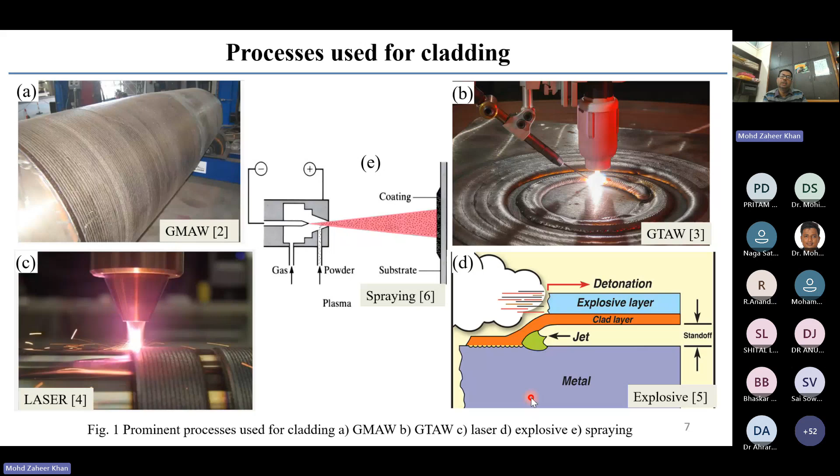So one of the first attempts we made was to clad a layer of copper on a mild steel substrate. Now remember, copper and iron don't really mix well; metallurgically, they are not very compatible, and if they are joined, several problems can occur.

So we tried the process of gas metal arc welding, where a spool of copper was taken and run through the GMAW torch, and an arc was initiated at the end of the copper. Such layers of material were attempted in the first trial so that we could optimize the process parameters.

Now remember, copper has a very different electrical conductivity, and its thermal properties are also very different. Producing an arc and forming droplets in arc welding of copper was also something new, but we could establish the process and develop beads of the desired profile, as you can see in some of these figures, and then several beads were placed one against the other.

When we used carbon dioxide as the shielding gas, a lot of spatter was produced. When argon was used as the shielding gas, there was a serious problem of arc stability, and the arc was getting extinguished. So a specific composition of shielding gas consisting of argon and CO2 was supplied.

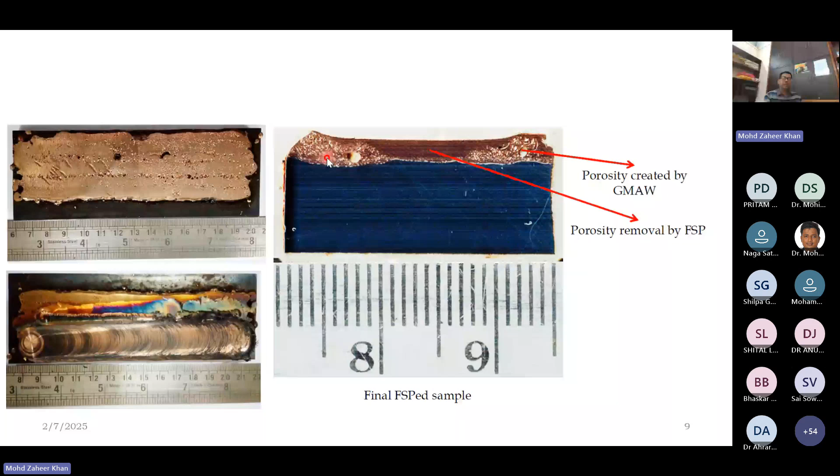So this was the first solution we offered: after a layer of clad material is deposited on the substrate, we can always perform friction stir processing to remove the defects that have been created because of the deposition of material by the conventional process.

Later, we moved on to a new set of experiments where what we wanted to do was eliminate the arc welding process completely. There were several problems with the arc welding process, as I've already mentioned, and it required that some amount of processing be carried out.

So we worked on a second idea known as friction stir based surfacing processes. Earlier it was arc welding based surfacing operations. Friction stir surfacing is very similar to friction stir welding. You all must be aware of friction stir welding, which is a process of solid state joining of material.

We take a non-consumable tool with a shoulder and a pin. The pin is inserted into the plate which has to be welded, and the shoulder and pin are rotated against the material. The frictional rubbing of the pin and shoulder against the material generates a lot of frictional heat. This heat causes the material to become hot and soft, but not to the extent that melting takes place.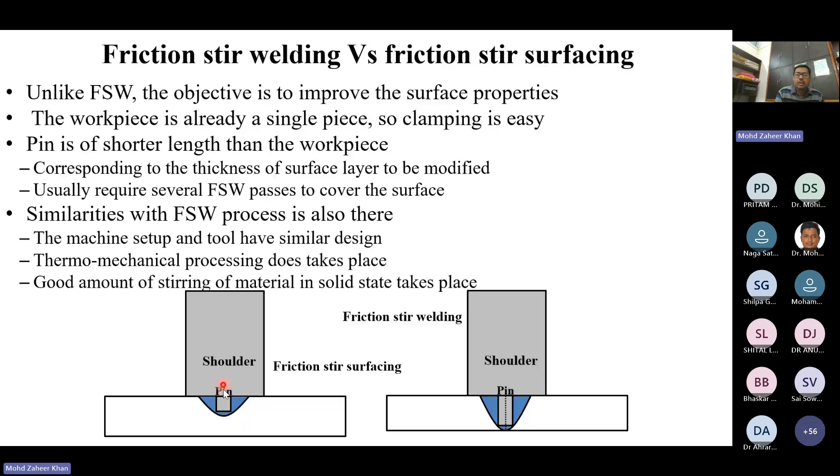But remember, this surfacing has to be done on the entire top surface of the plate, so the entire plate has to be surfaced. If we are just doing one friction stir processing pass, then only that portion of the material will get joined, or will get the surfacing operation.

So what you have to do is carry out several such passes of friction stir processing with some amount of overlap. As I do these passes, you can see more and more area of the plate getting processed, and we can cover the entire plate with several friction stir processing passes.

If needed, we can remove the portion where the pin has been withdrawn, because there is an inherent hole present. And if required, we can also do some machining to obtain a layer of material that is completely covered with another layer of material.

So to test our idea, friction stir cladding experiments were carried out. In this method, we took two different substrates - one was an aluminum substrate, another was a mild steel substrate. In both cases, we tried to clad a layer of copper onto the substrate. Now, I must again mention that copper as a material has compatibility problems with both mild steel and aluminum.

So deliberately we chose the combination of material such that with conventional fusion welding processes, it was not possible to get good quality of clad layer.

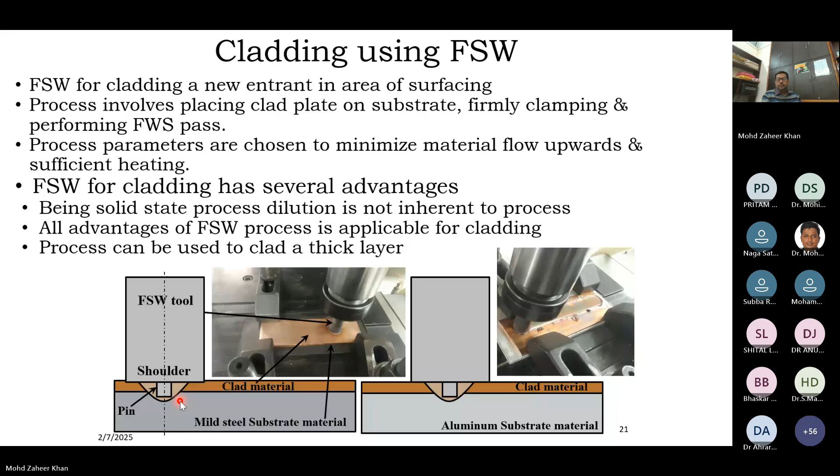Setting of the process parameters was another problem. As you might be aware, the friction stir welding process requires several process parameters to be set. That includes the tool RPM, the speed at which the tool has to be traversed, and the tilt angle, because the tool is not vertical to the plane of the plate, rather it is tilted on the side opposite to the direction you are moving the tool. So if you are moving the tool from left to right, the tool will be slightly tilted on the right side.

We had no previous experience of this, so we tried a range of process parameters, and there were some failures that helped us gain insight into the material.

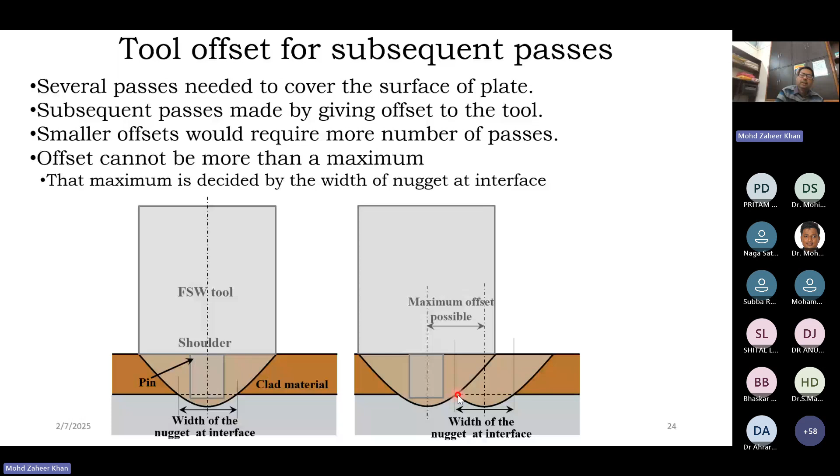After making this calculation, here also you can see in this pass, if the offset is too much, there is an unbonded region created. And if it is too less, then unnecessarily effort has to be there. So what we did is we tried several experiments, keeping the tool offset as 6 mm, 8 mm, 10 mm, and 12 mm.

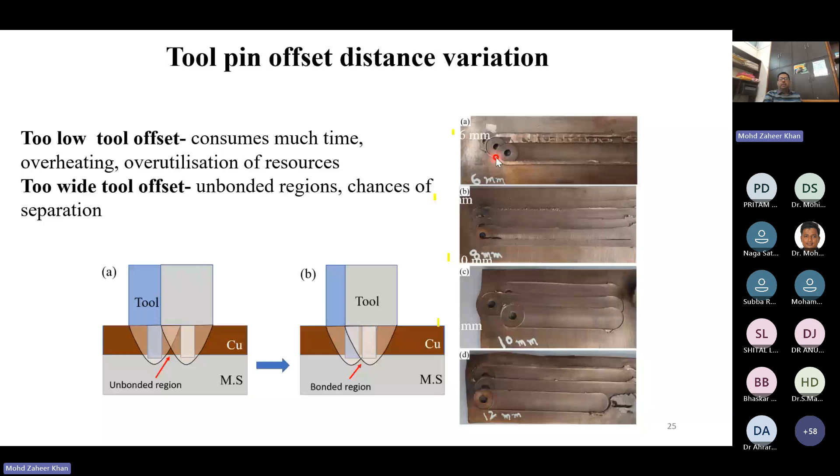This is the macrograph and micrograph of the cladded layer. Several passes with a 7 mm tool offset were produced. As you can see, this is the substrate, and on top of it is copper. During the friction stir welding process, you can see there is interlocking taking place. There is metallurgical bond as well as interlocking between the substrate and the clad material, and this interlocking further enhanced the strength achieved by the metallurgical bonding.

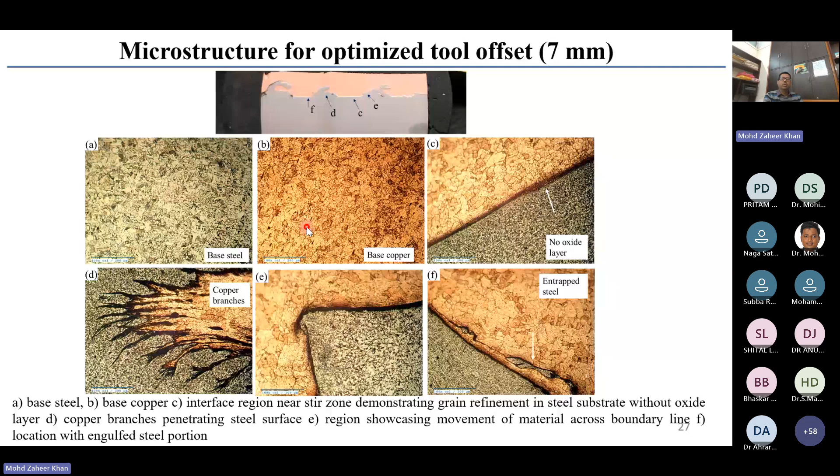After that, mechanical tests were carried out. From the cladded layer, tensile test specimens were machined out, and you can see once these specimens have been prepared, if you look at the cross section, there is a copper layer on top and a substrate at the bottom. Similarly, other specimens were created only from the substrate and only from the copper, just to compare and see how they behave.

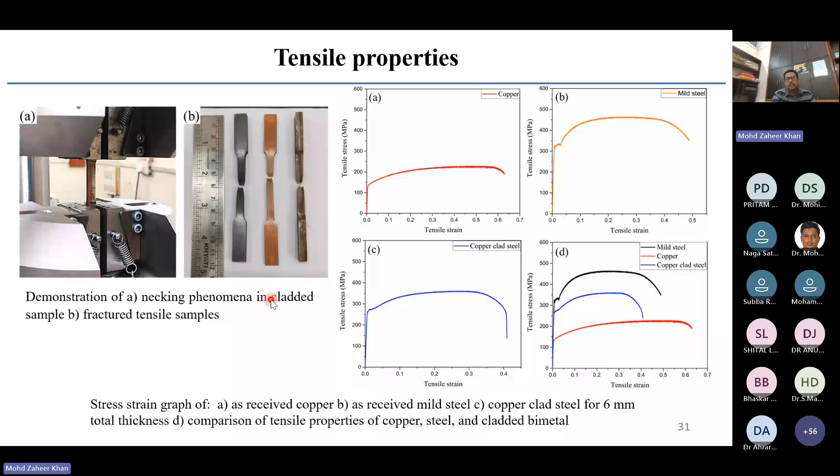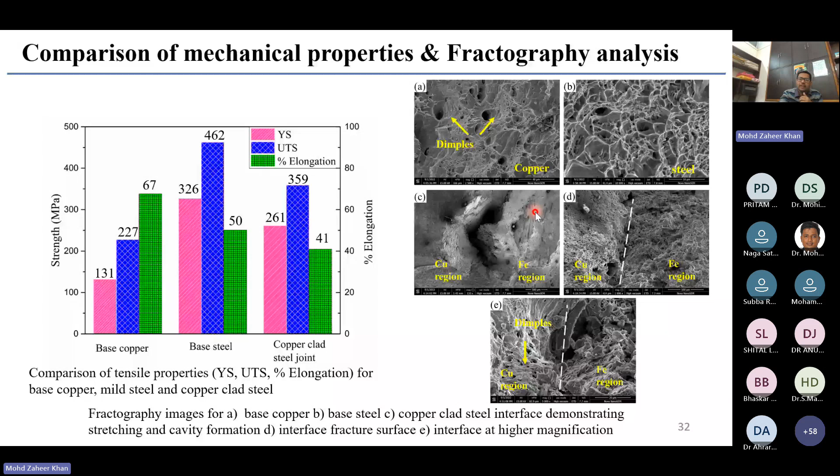These are the fractographs where you can see clear dimples present, and these two regions have remained intact even up to the point of fracture. So whenever fracture is taking place, these two regions are not getting separated. This is more visible in this magnified image of the tensile test specimen.

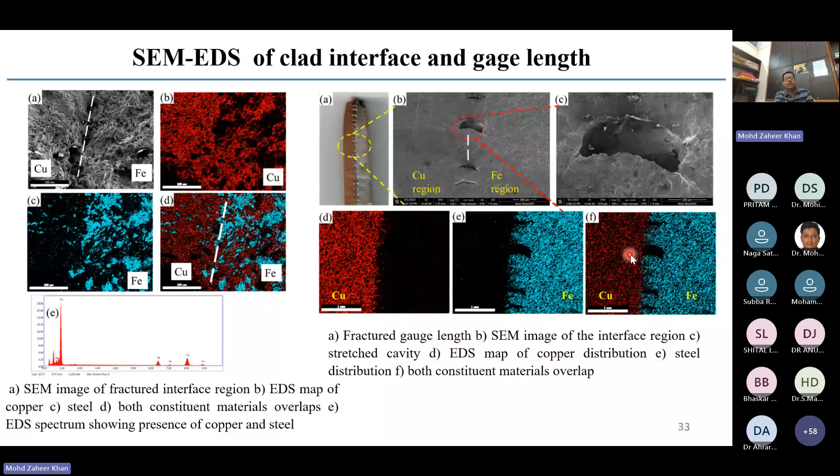As you can see, the tensile test specimen is fractured at this point, but when elongation or yielding is taking place, the two different materials are yielding together without separating out. These perpendicular voids are created, and even under the SEM we can see these types of voids present, with the material not separated. When we performed EDS, we found this region was completely copper and this was steel - so no intermixing has taken place, and the voids that were created are also partly on the copper side and partly on the mild steel side. So very good interlocking of these two has taken place, which can be proved.

As a conclusion, we can say that the friction stir cladding process can successfully produce cladded samples with good bonding between copper and the mild steel substrate. Tungsten carbide tool material with a low cobalt binder was found to be more suitable for the cladding operation. Process parameters for successful cladding were found to be 700 RPM and 100 millimeters per minute.

Grain refinement along the steel region was seen with an average grain size of 5 microns, while copper showed slight coarsening. Cladding suggests cross-boundary metal transfer near the interface, but radiography proves that the cladding specimen does not contain any flaw or defect. Mechanical properties of the cladded sample fall in between that of base copper and base steel. Fractography revealed no peeling was observed and the clad plate acted as a single material, and the bent edge confirmed no signs of crack initiation, delamination, or micro-crack along the convex surface.

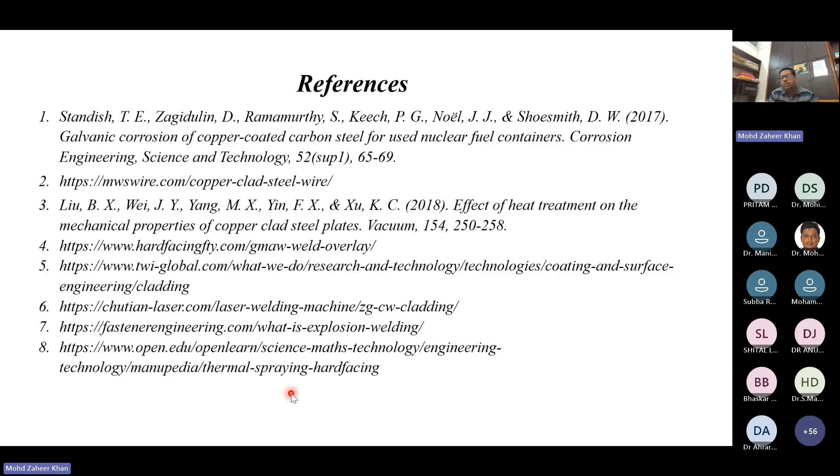The main objective here was that we have a layer of copper with very high ductility, whose deformation behavior is completely different from steel. So we wanted to see, when more copper is deformed, whether it peels off or not. This bend test was primarily carried out to see whether under extreme bending, with a lot of plastic deformation, the clad and substrate layers peel off or crack. We found that nothing happened, the peeling did not take place, which is quite successful. Second, if any brittle intermetallic had formed, cracking of the substrate or at the interface would have taken place, but in both cases this did not occur. I hope I am clear.

Yes sir, one more question. While using friction clad welding, what will be the optimum rotational speed and tool diameter which gives better results?

In our case we did several trial runs, and one set of process parameters is there in the PPT also. For this cladding operation we used: tool RPM 700, tool speed 100 millimeters per minute, tool tilt 1.5 degrees, shoulder diameter of the tool 20 millimeters, pin diameter 6.5 millimeters, pin length 3.5 millimeters. The pin shape was a truncated cone with no thread marks or other features. The tool material was tungsten carbide with approximately 7 to 10% binder, a ceramic-based tool. Cobalt was used as the binder holding the tungsten carbide particles together. We bought these tools as cylindrical rods, and the pin shape, length, and other features were created in our own lab.

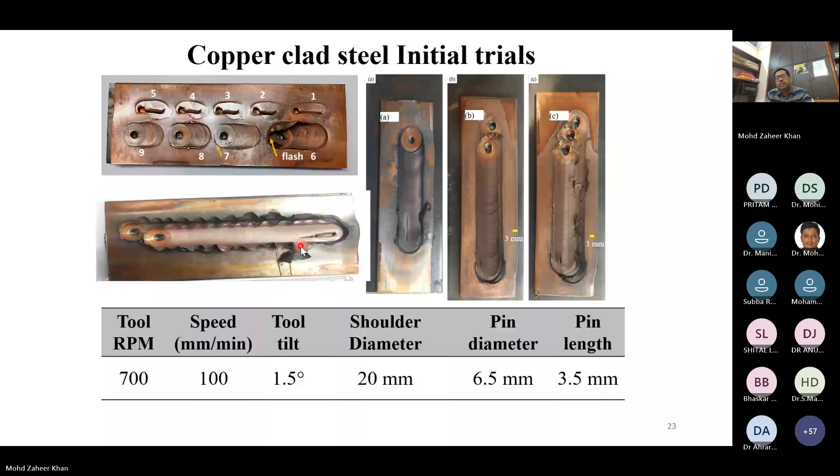The tool was made up of tungsten carbide. Basically, tungsten carbide is a ceramic material, and it is very brittle in nature.

And this tungsten carbide, I can show you also. So this is, you can see my camera. This is how tungsten carbide looks like. It is a very brittle material. If I just drop it, it will break into pieces.

This was having fine grains of approximately 8 to 10 micrometer grain size of tungsten carbide, and this was firmly bonded with some binder, and the binder used in our tool was cobalt, at approximately 7 to 10%. With different materials, with different vendors, we obtained different results, but 7 to 10% was working fine. So the material of the binder was cobalt, and the tool was mostly having tungsten carbide.